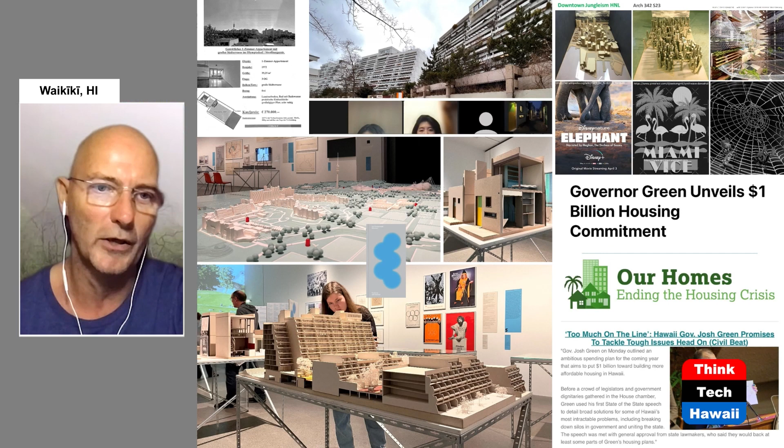And maybe with screens, for example, we'll continue to talk about it. Just before we do that, go to the next slide, because just before I left, I took a chance to show the emerging generation the other piece of zeitgeist. Trader Vic's in Munich started in '71, and you, DeSoto, for our Downtown Honolulu guide, are going to take on one of the chapters about the tradition of innovation that you were part of when you grew up in Honolulu.

For Munich, it must have been the early '70s, because they put Trader Vic's in the basement of the highest end hotel. We also won the bid for the '72 Olympics that Matt, your founding father Günter won the competition and basically built it. Then another firm, Heinle Wischer and Partner, which we learned about from the exhibit the TUM University did, and we just missed visiting with the emerging generation by a day or two.

But I didn't miss it. I took the guide with me that I show in here, clamped between several pictures. So I showed it to them this way.

I took them to what I learned from the exhibit, that Heinle Wischer and Partner got a direct commission, but also got it because they were finalists in the Olympics competition, as one of the justifications, I guess.

And DeSoto, we were talking about this over and over again, and this continues to be one of the finest examples of people- and planet-friendly domestic architecture. I have to take you up on your offer, Matt, about some people who live in there, because I have never been inside, shame on me. So that will be the next step.

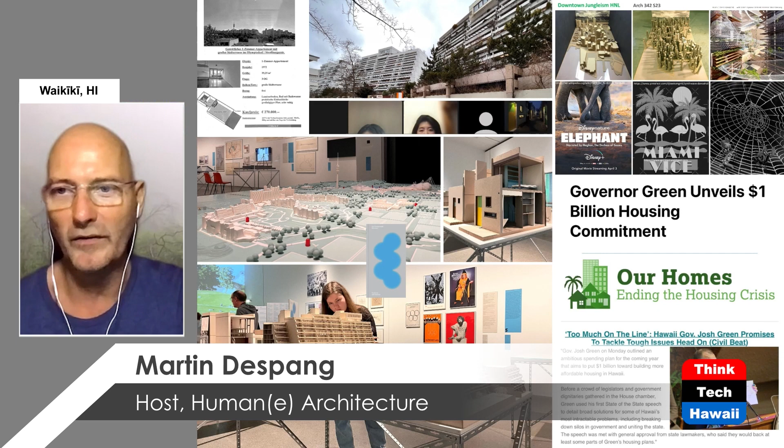Because it is a prime example for urban, vertical, inclusive, easy breezy living, as much as you can get it in Germany. You've got lanais and planters, so you can grow your fruits or at least your herbs, some small vegetables. And that's, as DeSoto and I say, what everyone should have here in Honolulu.

So it's on the other end of the world, half a century ago, but still pretty up to date.

There are a lot of people who think high density mid-rise development for housing is really the optimal solution, right? Yeah, yeah, yeah, I can see that.

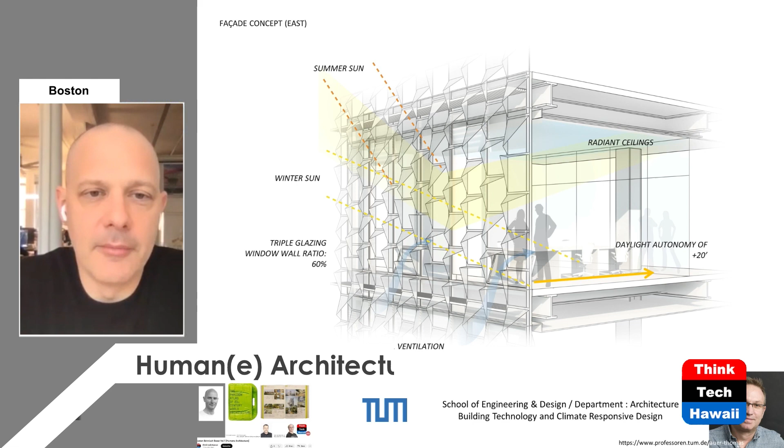The drawing is trying to show a number of different things. As you mentioned, the angles of the sun are what's driving the development of this screen, with the idea being that in the spring, summer, and fall, when the sun is relatively high, those are the times of year we want to shade the facade. We don't want the sun to hit the facade, because once solar radiation penetrates the glass, it heats up the inside of the building and contributes to the need for more air conditioning. While in the winter, when the sun angle is very low, having it penetrate through the screen to pre-warm the space behind it is not actually a bad thing.

There's also a whole number of other things going on relative to the design of the building. All of the glass area is triple glazed, so it's much more efficient and loses far less heat than a more traditional double glazed wall. We're seeing that a lot more as a standard component in buildings now. In Europe it's been that way for many years, but it's beginning to make a dent here.

The screen's upper horizontal surfaces also reflect daylight into the interior of the building. We were very intent on trying to drive daylight as deeply into the floor plate as possible to achieve what's known as daylight autonomy, which measures what percentage of the working hours of a typical day you could function in a space without having the electric lights on.

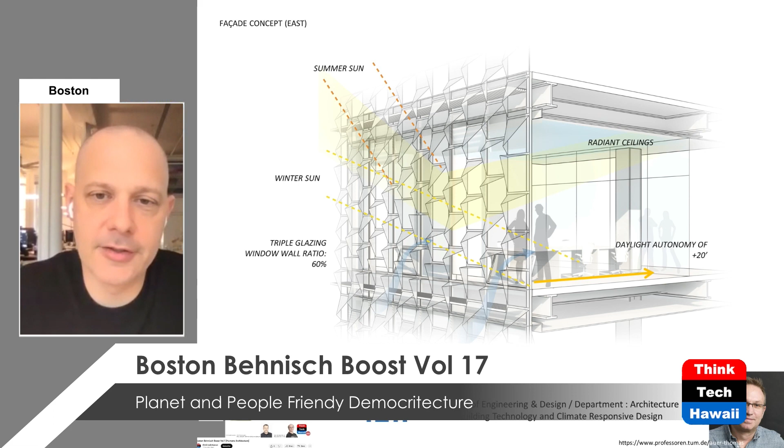People feel that in the same way you feel the sun on your face when you go outside, even though it's a million miles away. The important thing with radiant surfaces is direct visual contact to the surface, not proximity, and definitely not the movement of air. So it's a very quiet, very passive, and very low energy way to condition spaces.

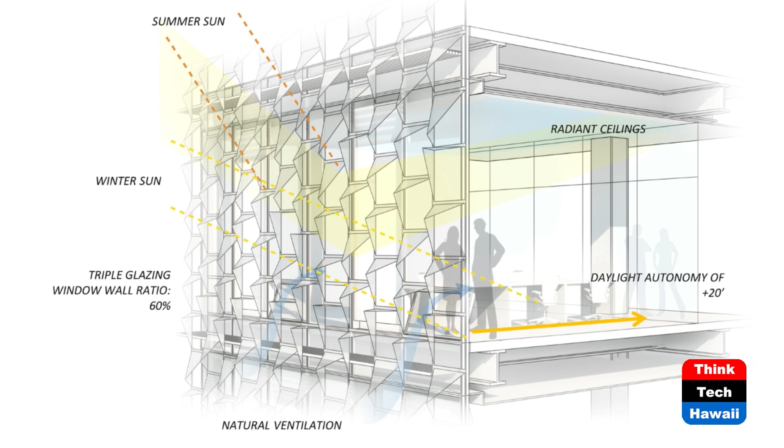The last thing I'll mention is natural ventilation. The glass wall behind the screen in each regularly occupied room has an operable window, so people can walk up and turn a crank to get fresh air into the interior of the building, which we consider pretty much a human right when it comes to building design.

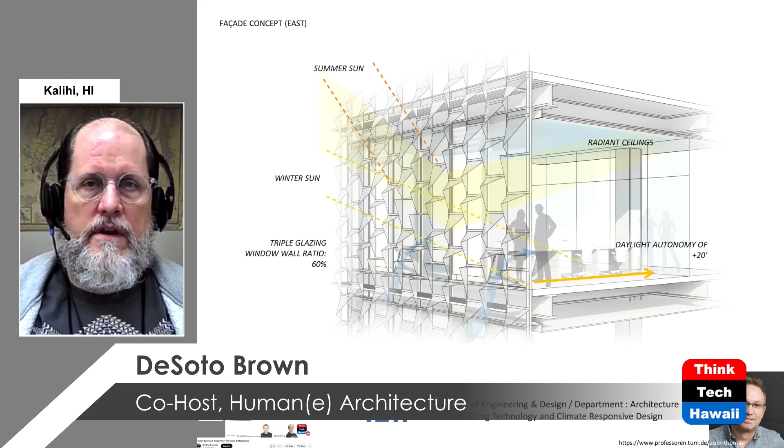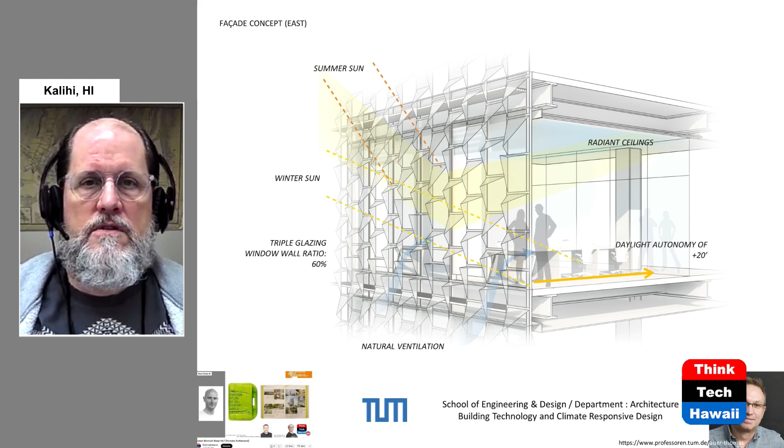I have two pragmatic questions for you, Matt. The first is, thinking about the IBM building, which has an exterior screen as well, one notable thing is Vladimir Ossipoff designed it so birds could not roost on it, and so it would not gather debris caught on the ledges. How does this screen deal with birds and windblown debris?

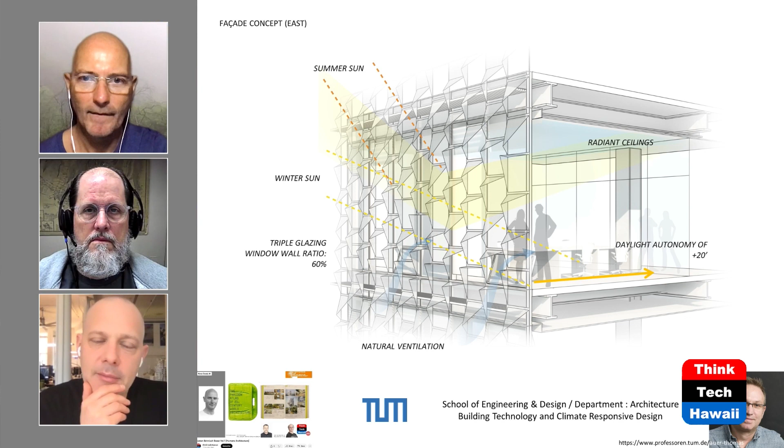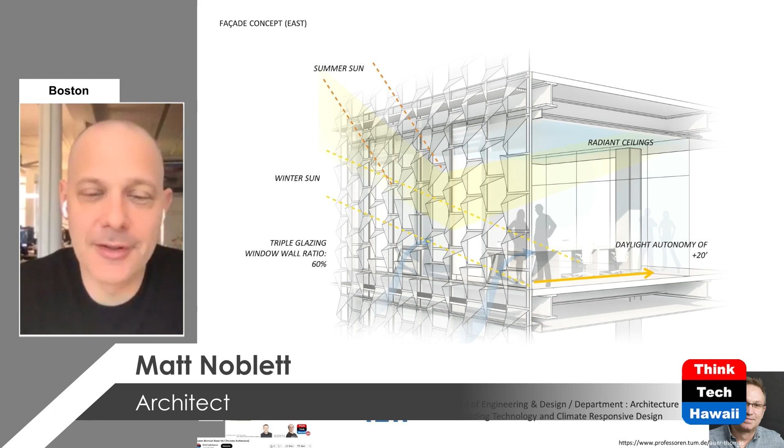The horizontal surfaces, the ones running parallel to the facade, are all sloped away from the building. What you find when dealing with birds on building facades is that they really look for fairly horizontal, stable places to perch. We actually have a consultant who helps us calculate these things, but effectively the geometry of those shades discourages birds from roosting there.

As far as debris, it's really the same answer. We also did a pretty extensive analysis of snow accumulation on these shades, and again, because of the downward sloping nature of the surfaces, it basically just sheds snow when it snows. So it's fairly benign in terms of those secondary, potentially problematic effects.

And now the radiant ceilings—how does heat get to those pipes? Is that hot water circulating through them? It's either hot or cold water, depending on if you're in heating season or cooling season. But exactly right, it's a little half-inch tube that goes from the building system.

What about potential leaks from that? All of the piping is exposed and visible, and it's all tested. The piping on the back of the ceiling is all copper piping, so they use flexible piping to get to the panels, but copper piping properly soldered and fabricated in a shop is quite reliable, actually.

The bigger concern with ceiling surfaces like that is condensation. If you're in a very humid environment, you have to be careful not to have windows open when the outside temperature is above the dew point, because with a cold radiant panel surface you'll get sweating on the panels, which you have to avoid. So the windows are interlocked with the panels, so that if the windows open, the panel shuts down, and vice versa.